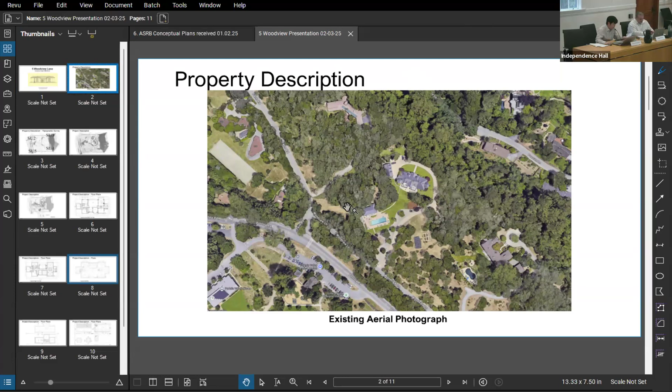To give you a brief property description of 5 Woodview Lane, the subject site is 5.54 acres located on Woodview Lane, shown here, located at the southern edge of the town of Woodside.

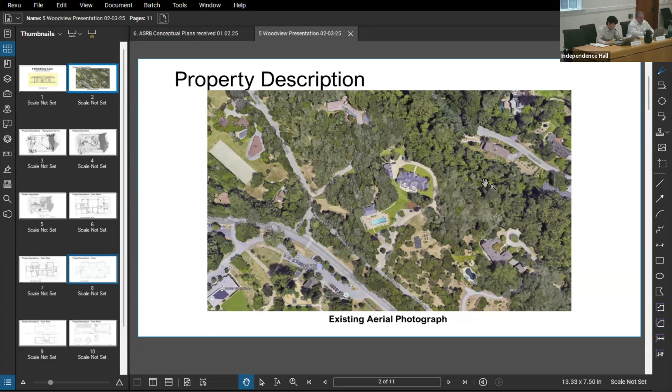The topography of the site extends upward from Woodview Lane to the central portion of the property, and the slope declines from the eastern portion, starting from the back of the main residence, all the way to the rear portion of the project site. As you can see here, the rear portion of the site is heavily wooded.

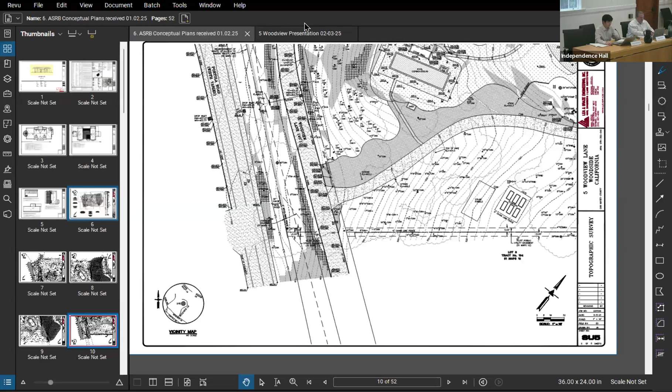Going back to the proposed project, you can see some of the proposed developments. They're keeping the existing pool and pool house here, but as noted in the staff report, they are proposing to enlarge this overhang pergola structure here. They're also proposing a new cobble outdoor parking area in the rear portion of the main residence, as well as a new sports court, and also an ADU structure at the bottom portion of the site.

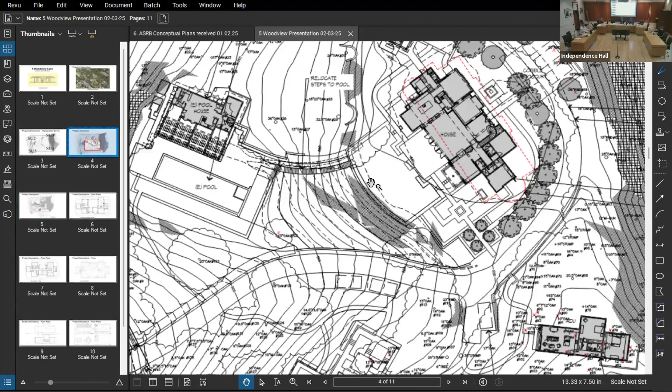This is detailing the landscape plan that they have here. What's existing at the site is a garden that they plan to enlarge towards the setback. This is detailing the existing pool and pool house, as well as the proposed paving for the sports court.

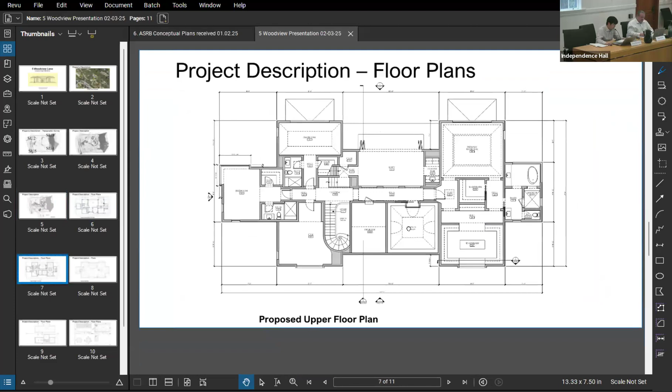These are the floor plans for the project site, including the proposed lower main floor plan. This is the proposed upper floor plan. This is the proposed roof plan. This is a floor plan for the proposed ADU. This is the proposed garage roof plan.

Again, for the garage as well as the pool house, the footprint of the structures themselves won't be changed. It's more of an interior remodeling, except for this pergola attached to the pool house here, which would be enlarged from what currently exists.

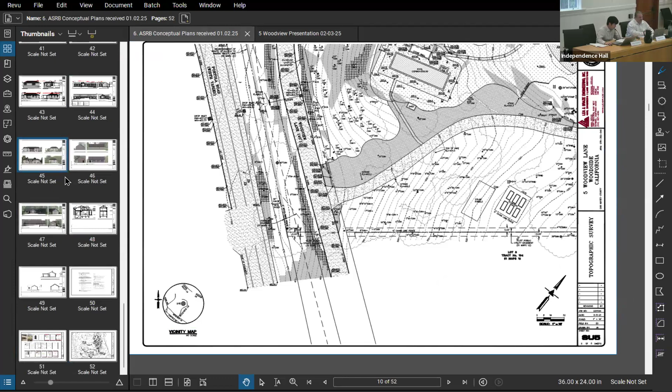As part of the plans, the applicant has also provided renderings of the proposed project, including renderings for the proposed main residence, starting with the north elevation. This is the east elevation. This would be the south elevation. And this is the proposed west elevation for the main residence.

The renderings are also provided for the garage. This is the north and west.

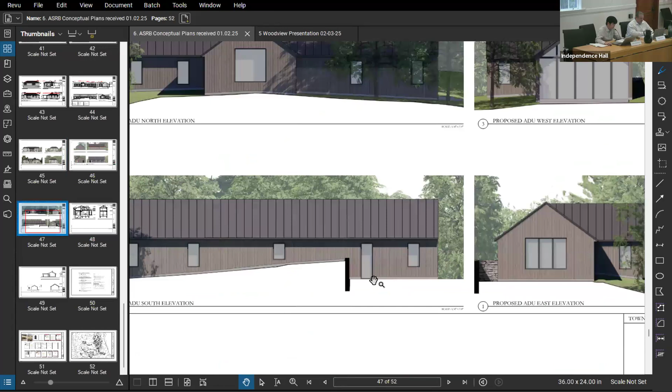This left is the south elevation, and this would be the east elevation. For the proposed ADU, the applicant has also provided renderings for the north. This is the west elevation. This is the south elevation. This is the ADU east elevation.

Before you, the ASRB, the applicant has provided physical sample materials, which include natural fire-resistant materials, stucco walls, stone base, steel windows, and the stucco would be an earth tone gray, and it would match the community character. The ADU would also have vertical wood siding, metal roofs, stone base, and steel windows.

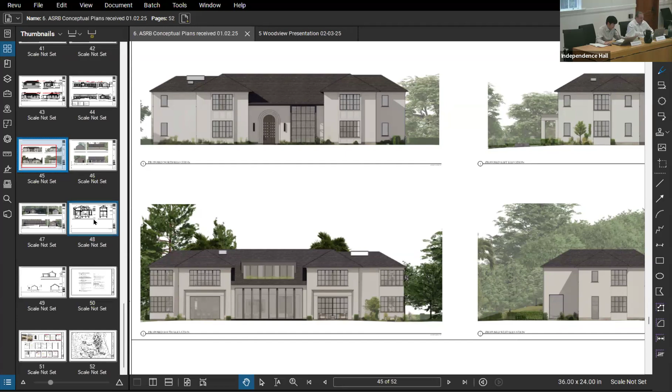As detailed in the architectural design statement, going back to the house, it is oriented with a large opening to the south so that it lets in ample winter sun for warmth, while the steeper summer sun angle will allow for less direct sunlight to enter the house. The house has been sited in a way that the existing trees to the east and west provide morning and afternoon shading, and the deep eaves will help take advantage of the winter/summer sun angles. Solar panels have been planned for the garage roof as shown in the renderings here.

So that concludes my presentation. Staff is happy to answer any questions. The applicant is also on Zoom to answer any questions as well. The applicant has stated that they installed story poles at the site back in late December.

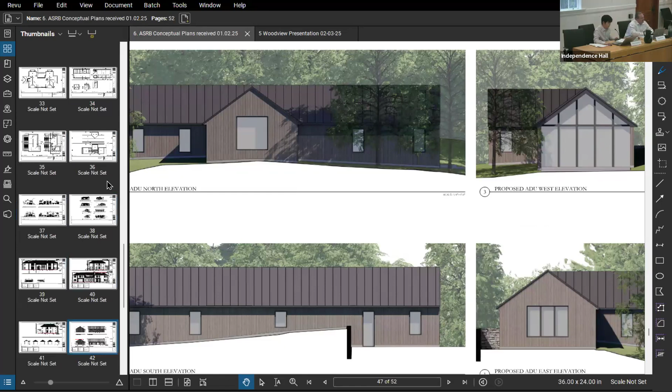I just want to add one thing: the applicant is proposing a sports court located within the required side setback. The code is very specific that only tennis courts can go into required side setbacks. This sports court is only about 2,000, a little more square feet, whereas tennis courts at the smallest size are around 7,000 to 7,200 square feet. Also, this shows a basketball court, which would not qualify as a tennis court. Therefore, with formal design review, the sports court will either need to be removed or relocated somewhere that meets required setbacks.

Thank you, you preempted my question. Just process then, does the relocation of the sports court need to be resolved in conceptual design review? It's really just part of the overall review of the project. If that's something the board feels needs to come back for review, it could, or if it's something staff is comfortable reviewing, depending what else happens with the rest of the project. But yeah, it could be dealt with. It definitely needs to be addressed at formal design review, whether that's done with staff or ASRB.

Okay, does anyone on the board have questions of staff? Regarding the sports court, if they wanted a variance for it, would the findings be met with the garden being so close to the other setback? We haven't looked at that. It would probably be difficult to meet the findings, just trying to understand what the unique circumstances of the lot would be, where something like that could not meet setbacks.

Can you pull your microphone closer? Works. Works. Thank you, Don.

There's a mention that the total floor area, it's on 9. Allowed is 13,000, proposed is 10,000. But then there are comments which I'm not sure I fully understood.

So ultimately, there's no exception asked for, right? There's no exception to the total floor area being requested. The applicant will need to file for a maximum residence size exception to go over the 6,000 square feet. But as we may recall, the residence size exception is just a formula. It's a matter of what your lot size is, you plug it in, and it tells you how much square footage you shall get with an exception. The exception itself does not trigger any different process. So that's the one exception that wouldn't trigger planning commission review by itself.

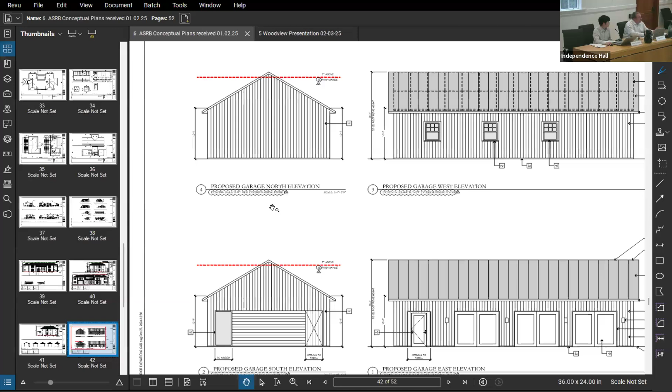Staying on this topic, I noted the proposed garage height exceeds the allowed height by 1 foot. Does that require a variance? They're showing that as the existing and proposed height. What they need to do when they get into a building permit is actually survey the height of the existing. If it exceeds, that's okay, it's just legal non-conforming - it just means any work they do there cannot exceed what's there now. If they were to exceed what's there now, then a variance would be required. But if they're just replacing or keeping it within that same envelope, no variance would be required.

That was in reference, Don, to page 10, right? Setbacks.

Hypothetically, if solar panels were installed on the garage roof and brought the height up by another foot or so - sure, that would not be an issue. Solar panels really just don't fall into that category. It's a very good question, because that little technical increase, if it was some other kind of feature, it would impact the height. But for solar panels, something like height and zoning code requirements cannot be applied - it's really based on state law, health and safety issues.

Any other questions for staff?

Just one more clarification - some of the illustrations, or renderings rather, show gray color, some of them show what appears to be white. Is it basically just conceptual inaccuracy, or do the samples show that? We really should rely on the samples themselves, not the printed computer colors. I think what we're seeing here is different shadowing, showing lighter and darker colors on the renderings. But that's the main reason we actually require the samples themselves, because that gives us a better indication of what's being proposed.

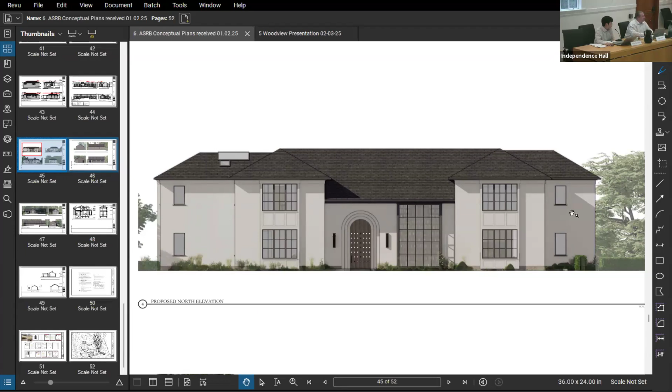Let's get into that detail. Okay yeah, and I think that side there - it's the gray side. The back was just the label. Okay.

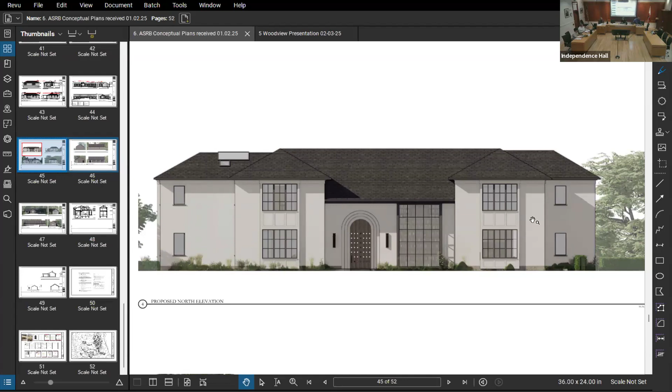Any other questions of staff? Otherwise, move on to the applicant. Yes? Yep, all right, we'll move on to the applicant's presentation. The applicant is online here.

Hi, good afternoon, my name's Ken Linsteadt. Thanks for meeting this evening. I'm the architect for the owners at 5 Woodview, and we have our own little presentation here that I thought might help a little bit with understanding the massing of the project.

They're not necessarily in love with the aesthetics of this house, but we did go through an exercise to see if we could remodel it in a way that could achieve the goals of reaching a little bit more out to the views and physically reaching out to the garden. So rather than remodeling it, we looked at taking the house down, and you may notice in the story pole flags that we brought the house in. The footprint is now smaller than the existing house, but there's a more vertical orientation, mostly so we can get the bedrooms that are on the ground floor and put them upstairs to take advantage of the light and the views.

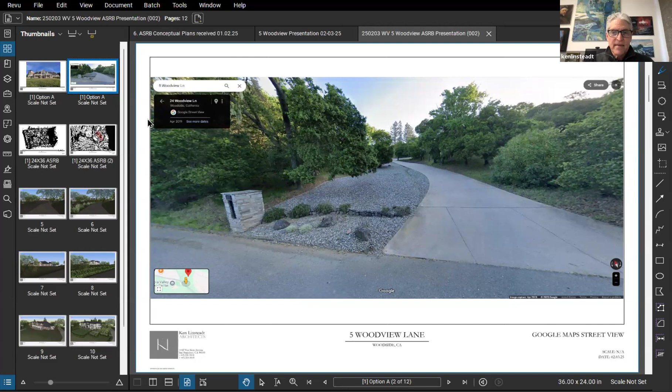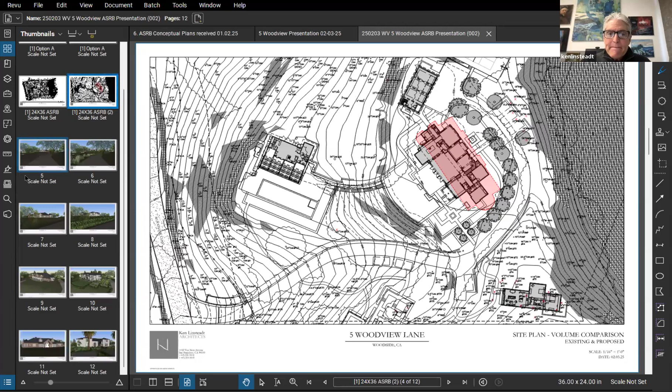Next one. So this is a series of renderings that we did just to give you a feel for what it's like now and what it'll look like when we've landscaped it with the new form. So what you're seeing here on this driveway is there's a pretty extensive gravel area to the north, or west, of this driveway that we will be taking out and replanting.

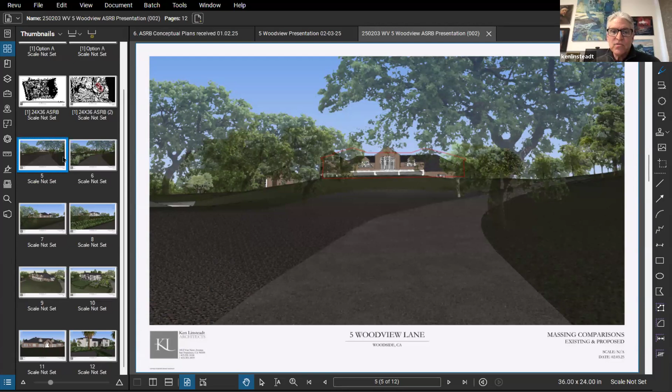But up above, you can see the way we've done this is we have red lines. The red outline is showing where the house will be. And then we do it both ways - when we show you the new look, it's going to show where the house currently is. So here's view one showing what's existing as you drive up, and then the next one shows the proposed.

What you'll notice is the current house has a tall gable that faces south. The way we're doing this is we're moving our taller forms to each end and then having a little bit more of a one-story feel to the middle of the house, albeit a taller one-story. We do have a dormer in that center space, but it's tucked within the roof, and we've painted it the color of the roof so that it really doesn't show up as a form you necessarily perceive right away.

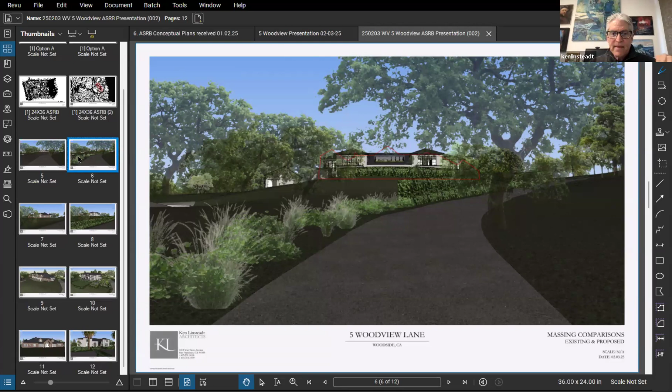So again, on this one, you're seeing the red line of the existing house, and they're roughly the same as you drive up. If we go a little further up the hill, which would be the next slide, this is existing, and again our red outline shows where the new house is going to be, which will be the next one.

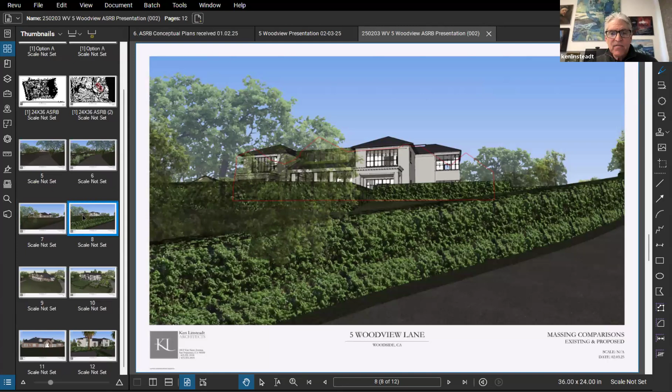And again, we're going to do some foreground planting so that we're not just looking straight at the house as we ascend the driveway.

So we could pause here for one second just to talk about the massing. There are a series of two-story forms, but we wanted to have this undulating plan, so to speak, so that not everything is all in one plane. We have some movement in roof forms, and that center portion of the house being a lower plate at the great room allows the house not to just be one solid eave that goes all the way across.

We also added these porch elements facing south to help break up the verticality and also to provide some shade for the ground floor.

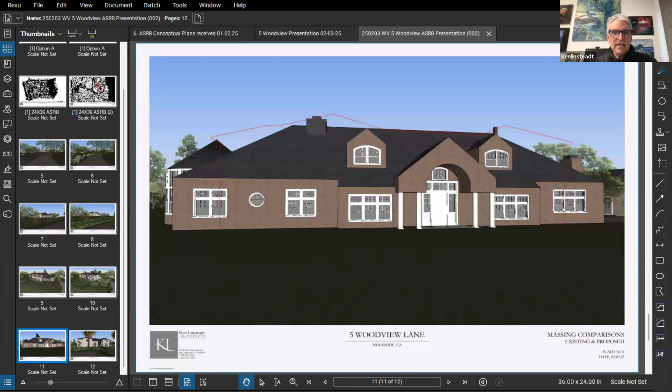If we go to the next rendering, this is the existing house, and you can see the red outlines again. This is showing a taller expression as you go to the entry. That tall window to the right of the arched door is a library space that has a two-story form in it. My clients tend to like symmetry, so we've created a bit of a symmetrical approach to the house between these two flanking forms.

We also opted for hipped roofs rather than gable roofs so that the stucco doesn't really reach above the ceiling height, so to speak. Everything stays down at the two-story height rather than going all the way up to the maximum height with a gable. I think that might be the extent of our renderings.

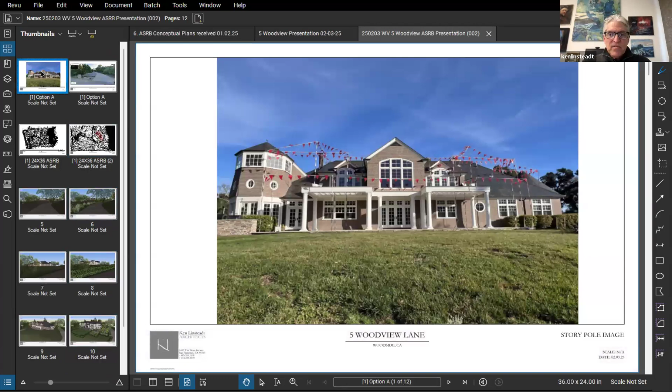Yes. So I wanted to go through those with you to help you understand the house a little bit more, and I'm happy to answer any questions you might have about the project. Thank you, Ken. Does anyone on the board have questions of the applicant?

Otherwise, I'll start.

In the package that was submitted to us, which we had the opportunity to review, there were renderings of the remodeled garage, pool house, and ADU, which take a very different direction in terms of materials. I'm curious if you could speak to your approach there and why you chose a different direction.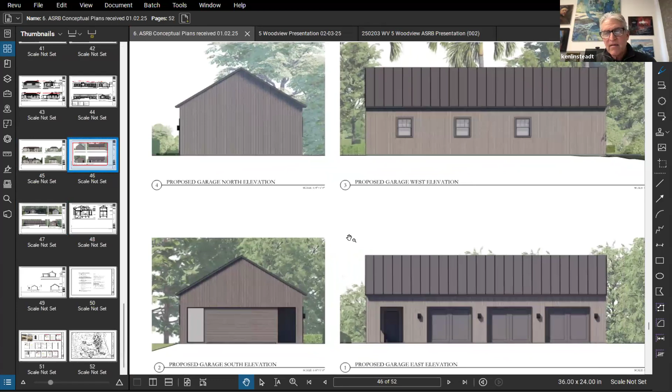Yeah, it's a great question. There was a desire to have these outbuildings blend a little bit more into the landscape and give them a little less importance than the main house. Not that they're really reading as barns, but the idea was to let them fade into the landscape more. The existing garage right now has dormers on it and doesn't really have the subservient feel we were hoping for.

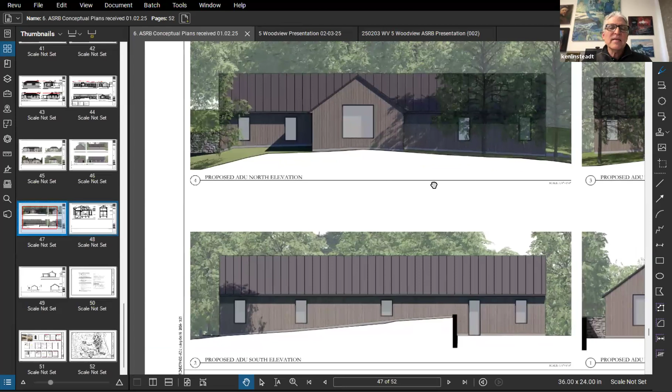I do think there's a lot of precedent for a house that has a slight bit more formality, and then having the outbuildings be more barn-like or a little more agrarian, I would say. So we opted for all of the outbuildings to take that tone, and let the house be what my clients really like - a slightly lighter colored stucco, just for the feel of the house.

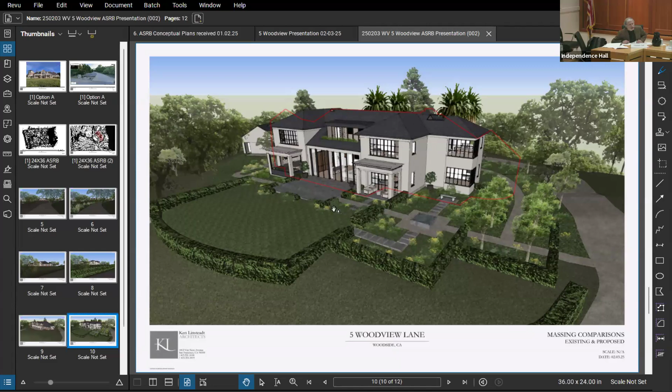The lighter color is not really visible much from outside of the property, is that correct? Is that a question? Yes, the lighter color stucco - it's not really like a modern barn, but if you could maybe describe the style in more technical terms - is it visible or not visible much from the street?

Right, it's not visible from the street. It's visible from the driveway, but not from down at Woodview. Yes, definitely not from the entrance gate, but from the other side. And not really from offsite either - I've driven around and I can't really find a place where you can actually see this property from the roads nearby.

So taste differs, but if any of the neighbors would ask that question, it really shouldn't bother anyone - that's what I'm driving at. Sorry, what is the question? In case any neighbors find it objectionable, that can't really be the case because it's not really visible, and whatever the owners prefer, if it more or less blends with what Woodside considers the preferred way of blending into nature, it seems like these requirements have been or will be satisfied.

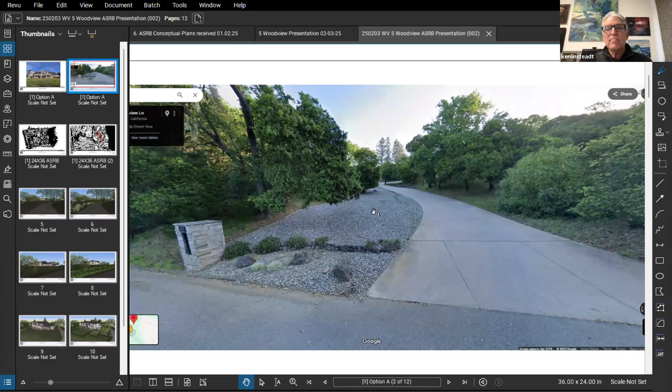Yeah, I suppose my approach here is to ask the board how they feel about whether the amount of lighter stucco we're presenting, combined with the more natural materials in the outbuildings, is okay given the guidelines. It feels appropriate to me, particularly given the amount of screening on this property. It may not be appropriate on a site where it's more visible, but this is stylistically an approach the owners are really fond of, so we're starting with this.

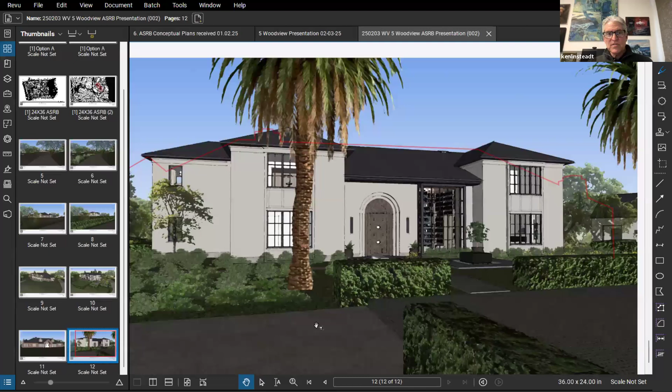What I'm driving at, I don't see any problem with this because it's not really visible. In many cases, when it is visible, neighbors may say, why is it so bright? Right, gotcha, got ya.

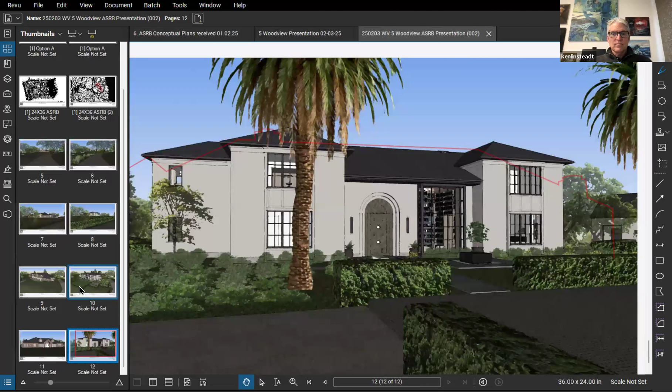I don't really have a problem with the light color so much - there's plenty of houses in Woodside with a similar tone. When I visited the site, I did notice I could see a neighbor from the carport area in the turnaround, and I'm a little concerned about screening back there in terms of vegetation and the landscaping plan. I'm also slightly concerned - at least in this rendering I see palm trees and maybe not so many California natives. Can you speak a little bit to that?

Did our landscape architect make it to this meeting?

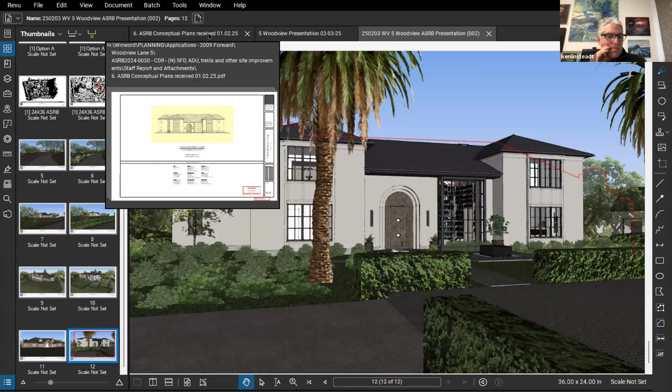I know the approach to the landscape here. Janelle Hobart is our landscape designer who we've done many houses with, and she has a very strong sense of the California landscape. These palm trees are an exception, a little more ornamental, but they're on the side of the house that no one sees. I wouldn't want these palm trees to lead you to believe the house is going to take on an overly Southern California feel.

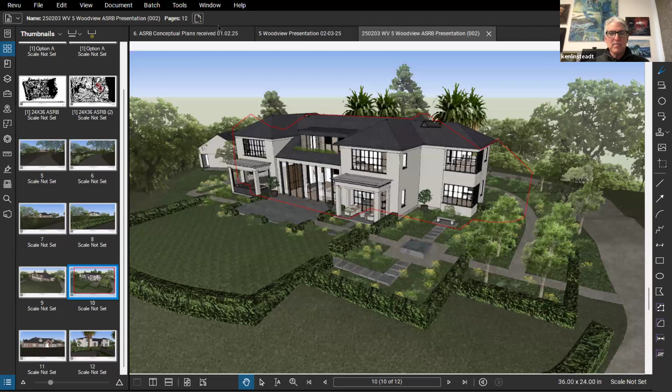I think there's precedent for it in Woodside, but I really can't use the language that the landscape architect could describe to you for this landscape. I don't know if we want to bring up the actual plans and see what the planting is, but I do know there is a strong desire for California natives.

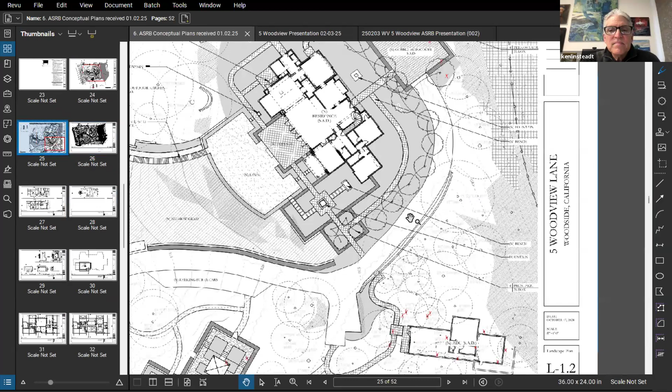Are you familiar with what I'm referring to about the neighbor to the north that you can kind of see through the trees? Can we find it, is it straight up near where the tennis court is, or beyond? I drove around to the garage and noticed I could see the neighbor from essentially where I was in front of the garage when I visited the site.

Our goal would be to make sure we all have privacy, so if there's a gap that could be seen, we would be very open to meeting with those neighbors and making sure we do the proper screening. There is a fair amount of foliage there. I was kind of surprised I saw it, though it might be because it's winter.

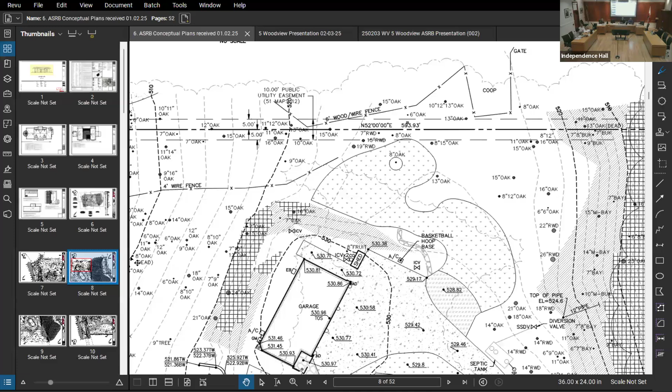There appears to be, on this drawing we're looking at now where it's marked chicken coop, a new ADU constructed adjoining that, immediately to the side. That's what I saw. The house itself is a little bit further away though. I was surprised when I showed up, after looking at it from satellite view, that I saw something - that might be a good image right there.

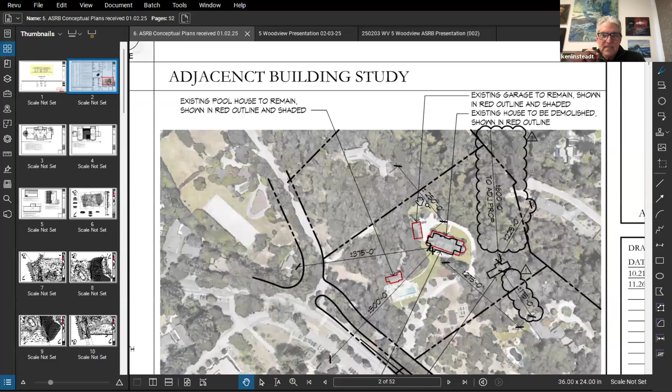The new house structure doesn't show up - it's 250 feet from our house. That's what I was imagining for the house we can't really see. I swear I saw something, I didn't take a picture unfortunately, but there's something through this - I think a garage. It's fairly easy to screen that though.

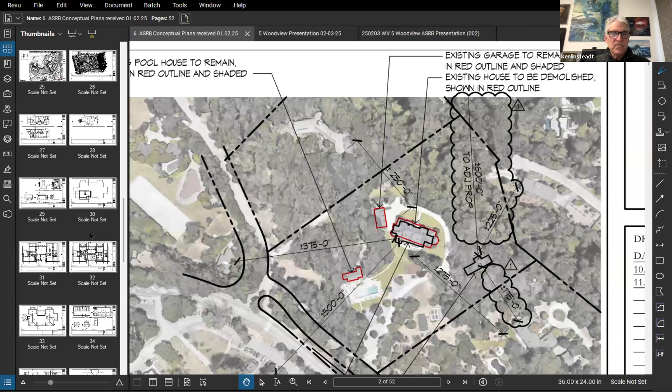Is this the forum for me to ask a question about the tennis court? Since the guidance was that we either make it a real tennis court or move it, it's counterintuitive to me that you could make it a lot bigger and make it a tennis court and move it closer to the property line. There must be a reason for that in Woodside, why a tennis court can get closer. Sorry to interrupt - these regulations have been in place for a really long time, definitely before the pickleball craze.

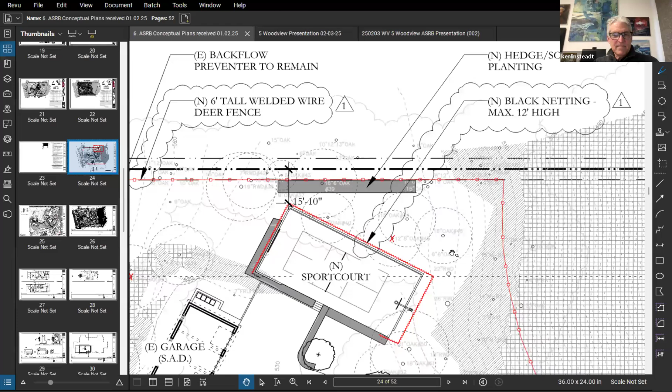For different types of uses, sport courts just have not been allowed. The code has specifically allowed tennis courts, and we've been down this road on several occasions. Not a tennis court - it should not be in the setback. If it is enlarged and made just as a tennis court, you also have to make sure you're complying with all of your paved area standards. Perfect, we'll address that in the next go round.

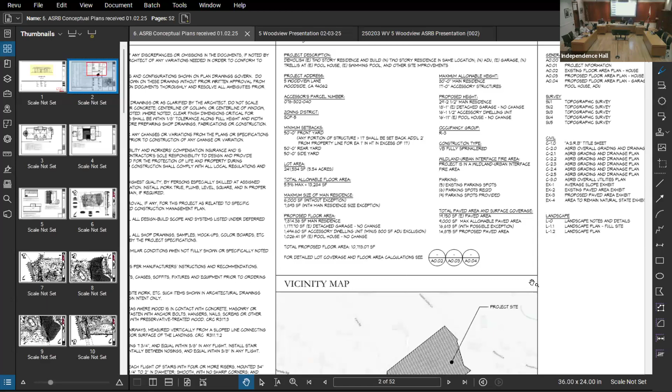So just on this topic, I do think it's worth getting a revised drawing of the neighboring property showing the proximity of this new structure. I'm assuming it's within the setback because it doesn't appear to be too far from the fence. You saw it too? It's under construction - I didn't get a good picture of it.

Okay, any other questions of the applicant?

So the existing solar array on the property, that will be removed and replaced with solar on the garage? That's correct. Is that an expansion or just a same capacity replacement? I'm not sure about whether it's an expansion or not. I know it's been evaluated by the general contractor and we seem to be doing just fine with it on the garage roof - we didn't necessarily want it in the landscape.

Related to that, there's a proposed seating area near where that existing solar array is, and there are story poles there. Can you describe what kind of structure that will be? There's a little pergola - I don't know if you can pull up the site plan.

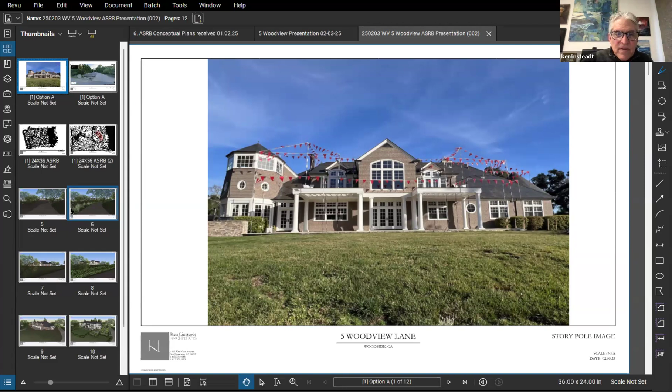There's an existing garden there already. We're just expanding it a little bit for an edible garden, and there's intended to be a small pergola shade structure right there. That's it. Open air. Okay, thank you.

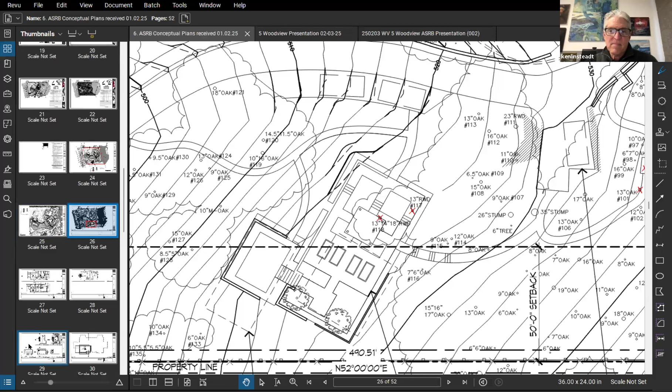Any other questions? Nope. Member Taft? Other than the desk item, which may well be in scope for us. There's also members of the public online that may want to speak. I think the planning director addressed that item in the opening statement.

Just to clarify with drainage, it often comes up at the ASRB level. It's good that neighbors bring this stuff up as early as possible. The conceptual design review plans have not been routed to the engineering department. So the way the steps work is the formal design review will be routed to the engineering department. We'll take the preliminary review of the drainage plan. And then ultimately, if the project is approved, we'll go to the construction phase. And then the construction permits also require the detailed drainage calculations, all of which get reviewed by the engineering department and have to meet all the necessary regulations.

General rule of thumb, I'm not an engineer and I'll defer to others in the audience or our own staff. But the idea is with a new project, you are not increasing the amount of flow or the velocity of flow coming off of the site. And in most cases, new projects will actually provide a benefit or will reduce the amount of impacts to neighboring properties. Although water goes downhill and will continue to flow off site, the amount of flow being created by the development itself should be captured on site.